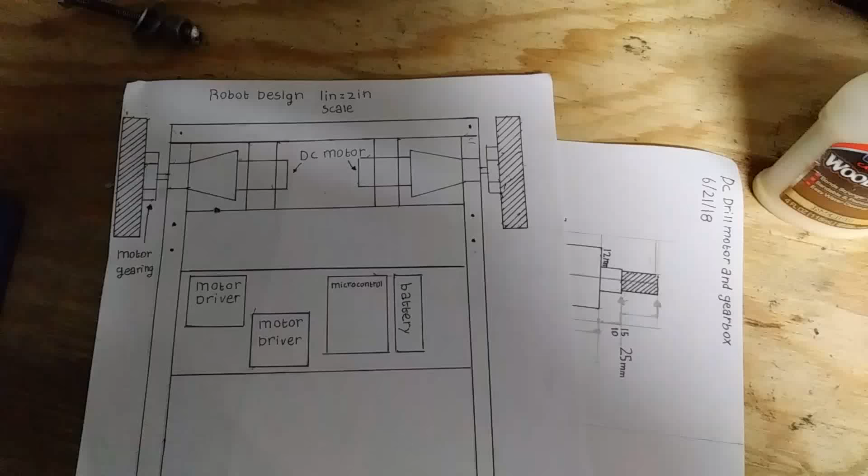So basically, as you see right here are some drawings. I want to make another robot.

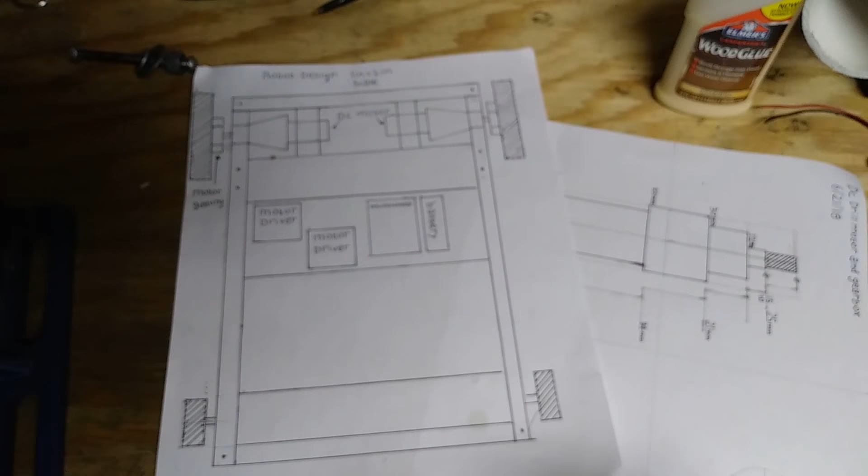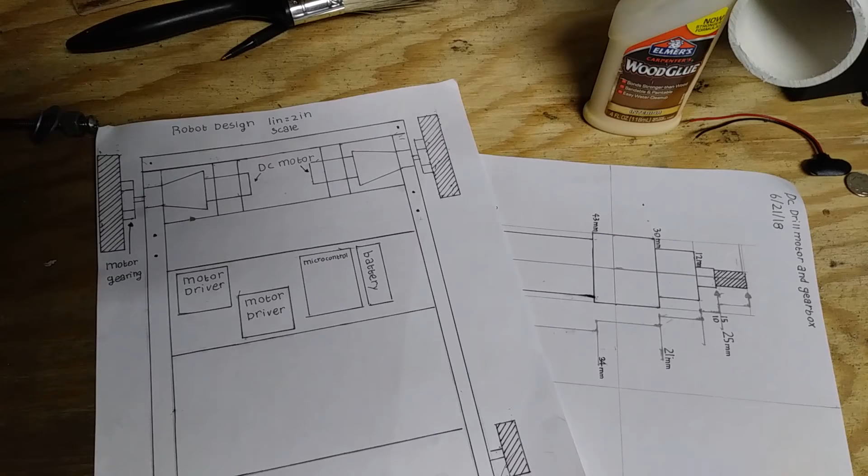If you have seen previous videos on my channel, I've talked about a humanoid robot which I am trying to build, and I'm still trying to build that. But as you may know, it is in no way able to be finished right now, and that's mainly because I don't have very much experience in electronic control of robots.

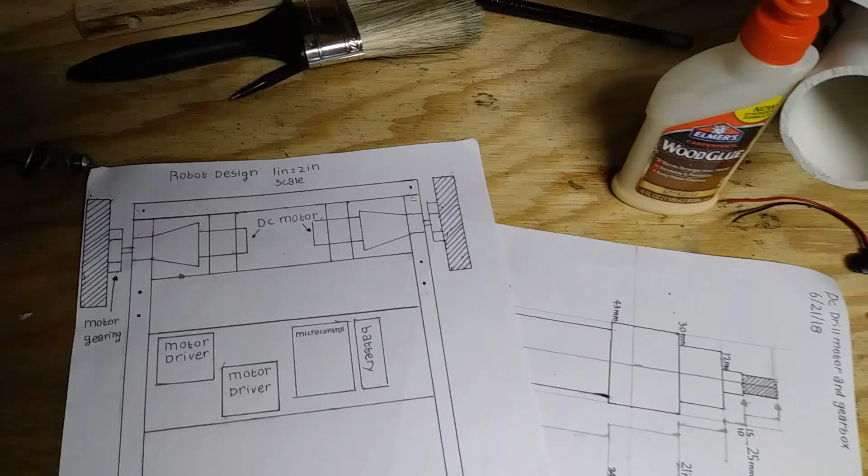I mean, I've programmed an Arduino and I've done all that stuff. I made the light blink, and I've done all that, but I've never really connected it throughout an entire system where I can control motors with a microcontroller through motor drivers, and it also has a battery.

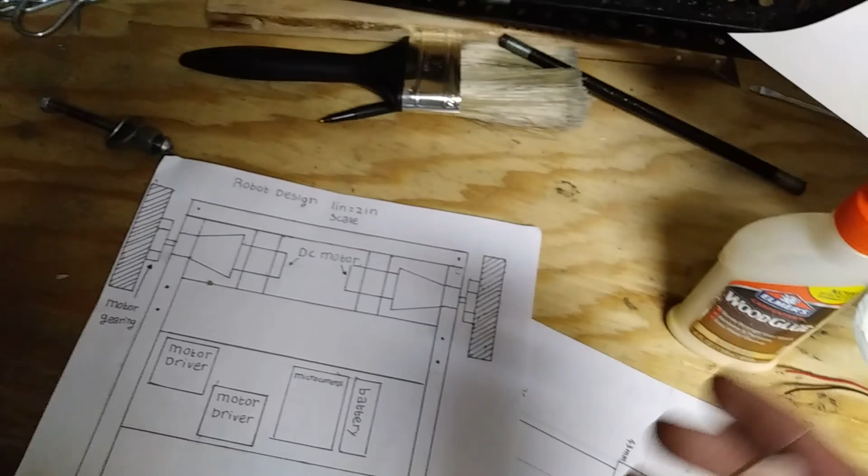This is evident in those videos. For example, when I test that robot, which I built, I used a mechanical system where there were Legos, and that would time out the movements of the robot using Lego gears. And there wasn't any actual electronic control.

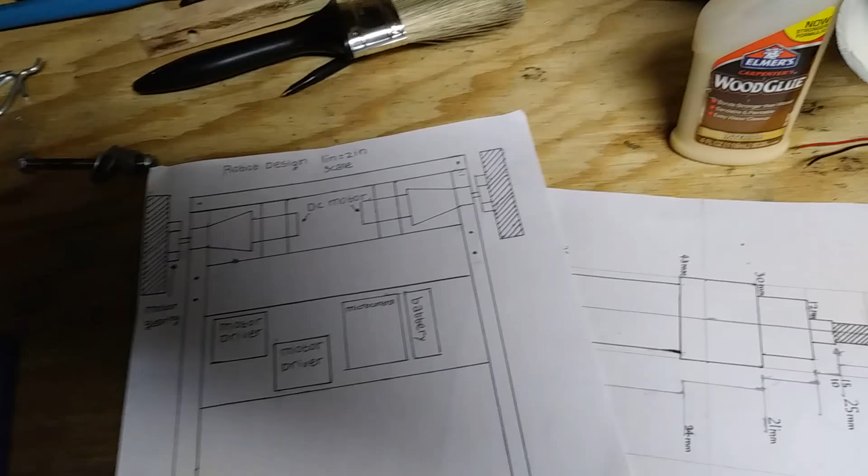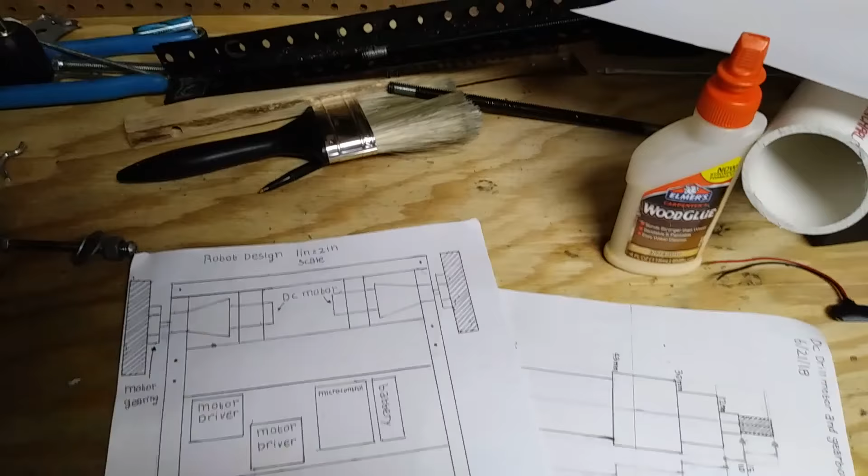But that actually was not the first time I've tried to make a robot. I have made a number of robots throughout the last 5 years or so. Some of the robots which I've tried to make work better than others, but most of them have never gotten very far. But I always usually build off of knowledge with each design.

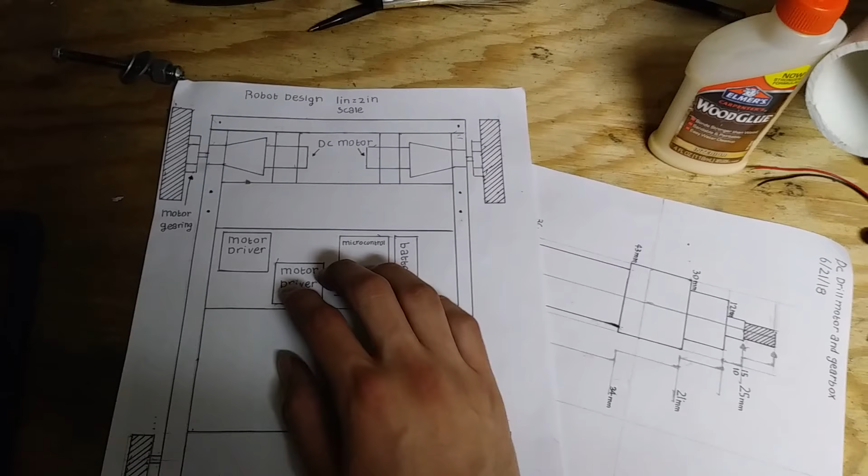And I want to go back to a simple design for a robot, basically just four wheels. And I want to get down good how to use a microcontroller and motor drivers to run the motors of a robot, and also have input from sensors as well, and just have a contained system which I could say is finished and is a functional robot. At that point, I will probably then move back to designs for the humanoid robot, which I'm still working on.

For this design, I drew this out on paper just to show the basic layout of how this robot would work. And I think it would be a good idea to use this frame right here. This frame is actually one that I made like around 5 years ago for a robot of this type.

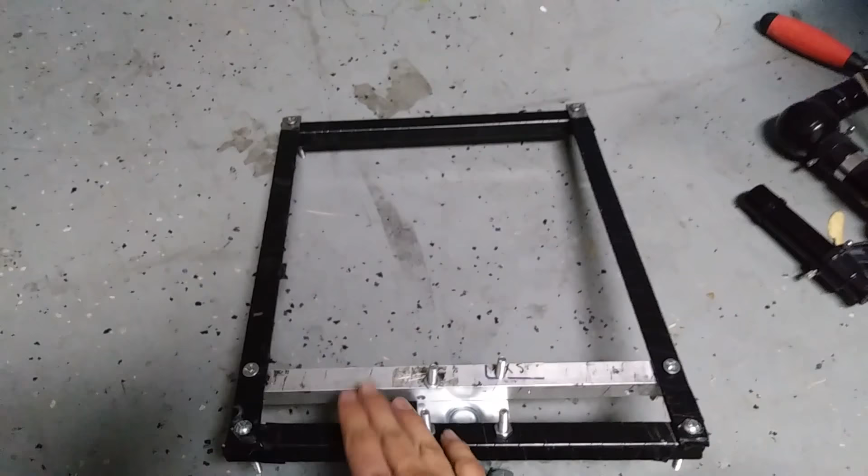Basically what it is, is a bunch of pieces of steel in a little square, and then there's a piece of aluminum bar right here. So everything black is steel, this is aluminum, and this is a caster wheel, you see right there.

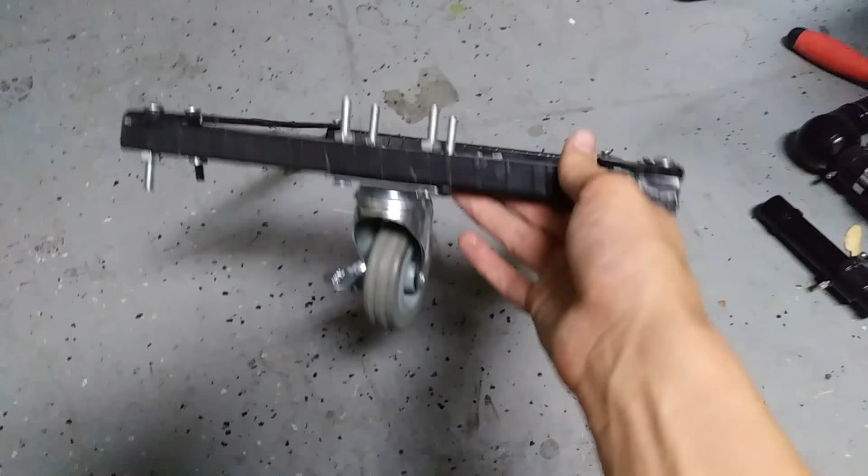I just reassembled this right now out of the parts that I had. It was taken apart for a very long time.

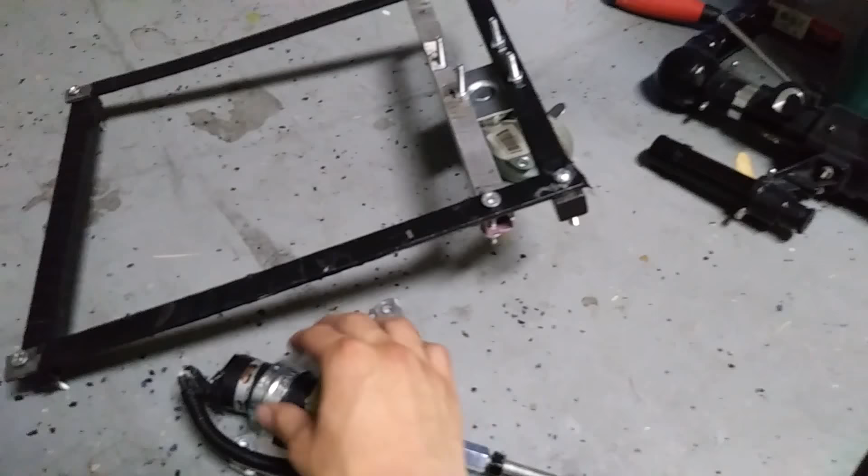But basically, we would have cordless drill motors on these edges. I forget how I mounted it, but it was not a very good mounting solution. It was a hose clamp around the shaft of the motor. So around here was a hose clamp, and then this was secured to this part with duct tape, basically.

This is from my humanoid robot. I just took it off for this example. This is a much better mounting solution.

It's aluminum bars. I think I actually made some of these on video. But as you can see, this is a linear actuator. And obviously I could just unscrew this and connect it to a wheel, and then we could have it like that.

What I do is just make a simple platform to experiment with electronics. I'm going to try to make my own motor controllers, and instead of just using an Arduino board, I'd like to solder a custom microcontroller circuit, and I need a very simple frame to work with. So basically the idea is I just refurbish this instead of having to make anything new.

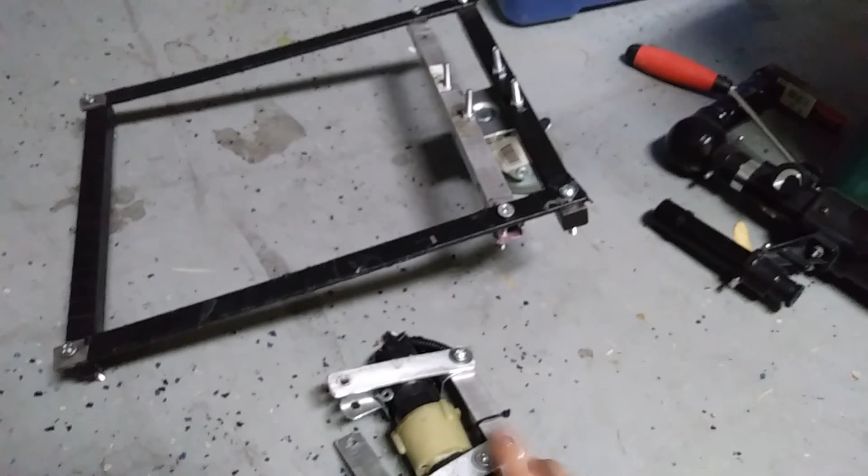I'll make some more motor mounts, get a couple more of these motors, put them on either of the corners there and there, and then we'd be good. We'd get some wheels.

Originally for this I used lawnmower wheels, but a problem with that was the lawnmower wheels had a 1/2 inch bore, and this is a 3/8 inch bore on this motor shaft. But I think I could solve that with 3D printing or some other solution.

It did seem to work fine on the original design of this robot by ignoring the problem, but I like to think I've become a more experienced designer of robots in this time.

So what we want to do is refurbish this to the point where I could make it usable. You can see a lot of amateur design, even more amateur than I am now, on this robot platform.

You see the edges of these pieces of steel are not filed down. It's covered in electrical tape to prevent it from rusting. I would obviously take it off and paint it.

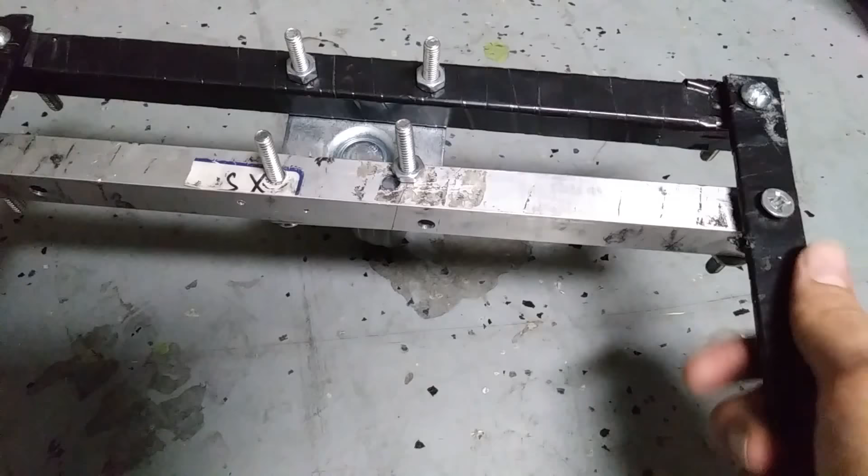And of course, ignore all these bolts. I just put them back on there really fast. I could do a neater job. But yeah, that's about it for that.

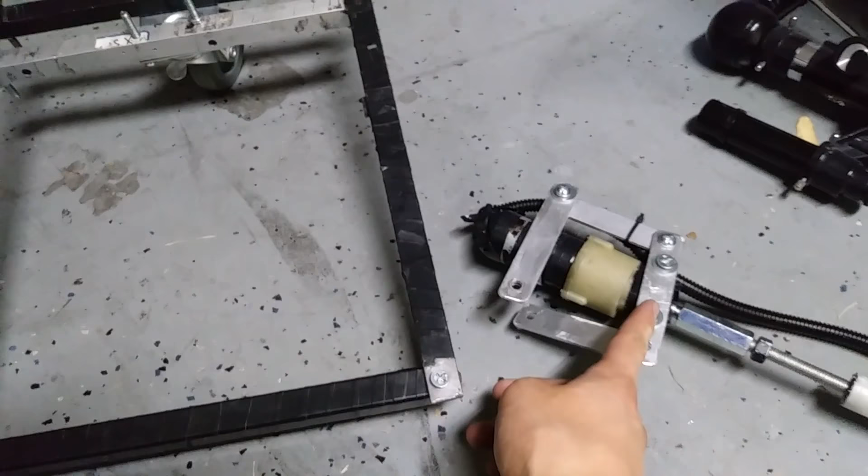Another thing I have to keep in mind is that I'm going to be using cordless drill motor brackets like this, and I have to find some way to fit these onto here. It's probably an easy solution that just involves drilling holes.

I don't really want to spend a bunch of money to refurbish this. Obviously, I'm going to have to buy wheels and a couple more drill motors, and grub screws to go in those drill motors, and all the electronic circuitry I'm going to need. That's more stuff right there.

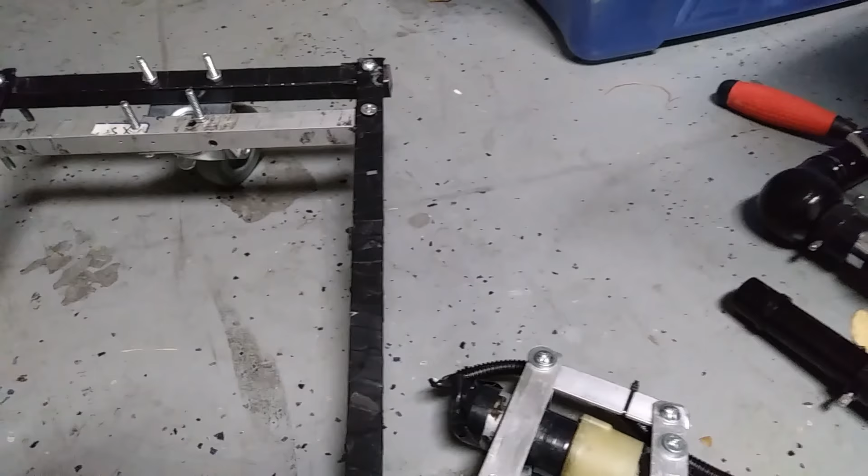But to refurbish this frame, I think I could use some of this metal right here. This is a piece of square bar, the same kind that is in here and here. So I could probably just cut that right there and replace it for there.

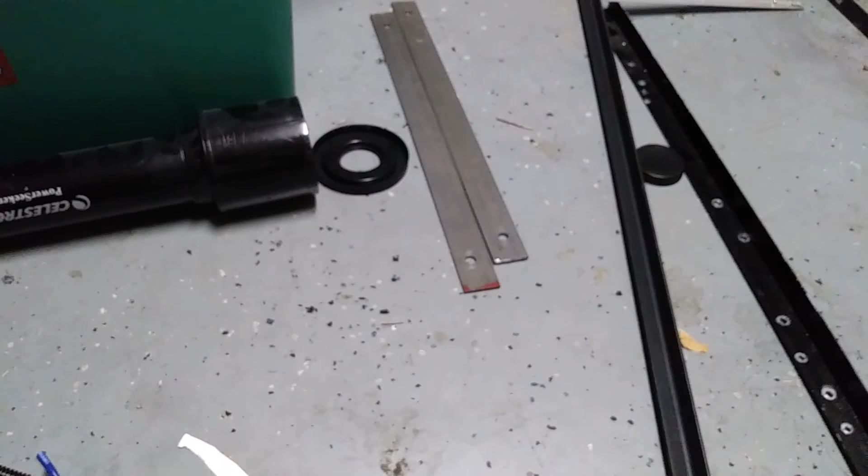And I have some more various pieces of steel. I'm using steel just because I have it. Aluminum might actually be better for this, but this design is specifically made for steel. If I replace these with aluminum, it would be quite flimsy.

I want to keep in mind that I've got to keep the weight down. So I think using all these parts in steel would be good, but after that I probably can't be using other parts of steel like this angle bar and those flat pieces right there.

I have some aluminum that I could use. These angle pieces are a little wrecked up, but this side is fine right here. And I have another one of those. There's another piece of aluminum over there.

That bucket's full of aluminum, I think. And there's a piece of sheet metal aluminum over there as well. So there should be plenty of materials to do this.

Obviously, I just want to get this made as fast as I can. And then I want to start soldering up some H-bridges. That will be one of the next projects, I think.

Whenever I can, I'm going to make another video showing about picking out various electronics and MOSFETs, which I'm going to use for the H-bridge to control that motor. And that's about all I can think of as of now.